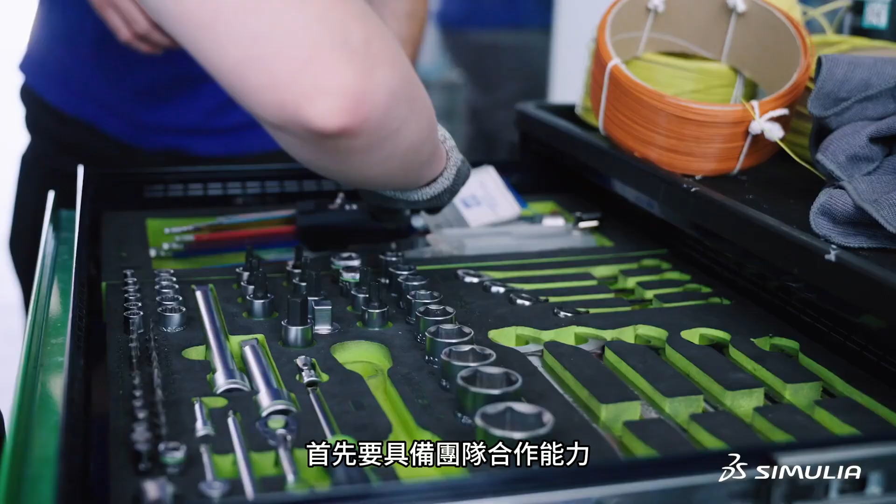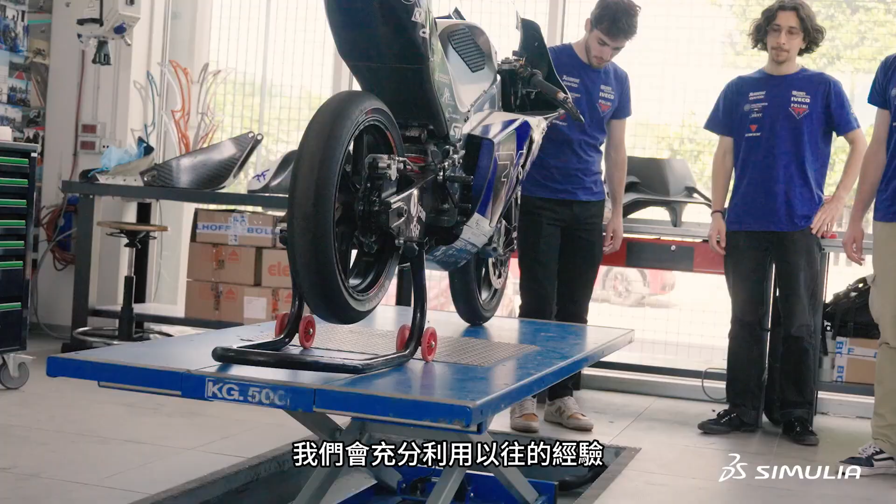The first quality is the ability of collaborating with other people. We start with mechanical engineers and we end with designers and architects. We don't start from scratch, we make treasure of the past experiences, but we try to start over and build new prototypes with improvements.

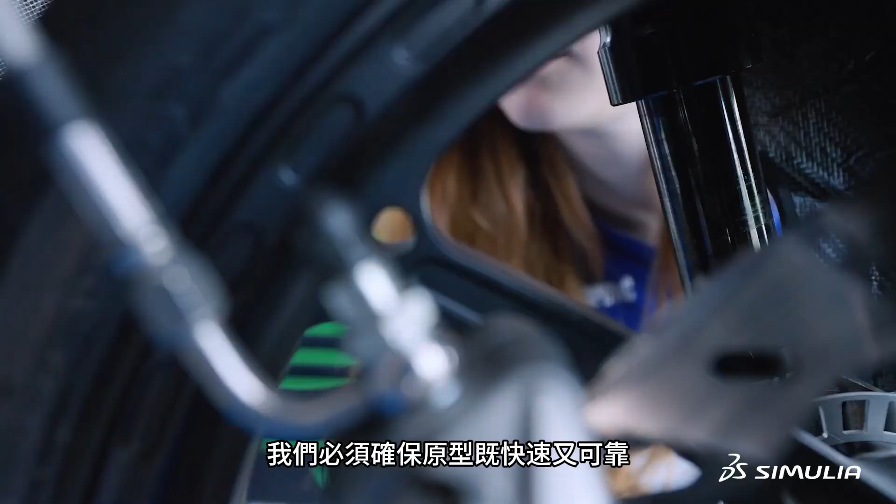We have to make sure that our prototype is fast and also reliable. And given the structure of our competition and our limited budget, simulations are greatly important to us. We need to simulate every single piece of the motorcycle in order to make our best.

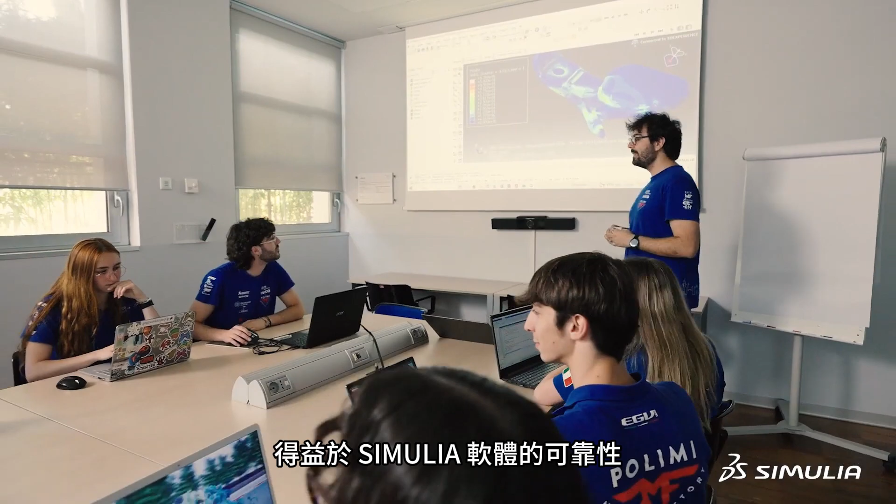We as a team started working with SIMULIA because of the reliability of the software. For the chassis and dynamics department, we rely on multi-body simulations as well as more analytical simulation based on analytical calculations.

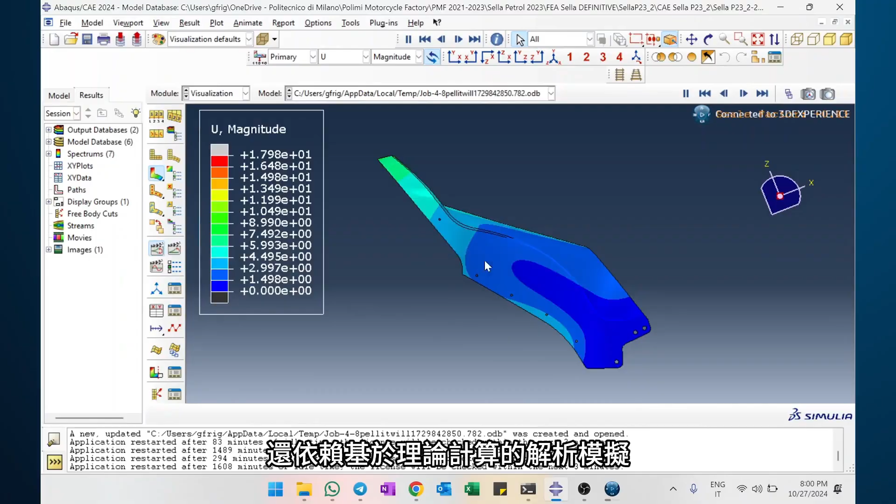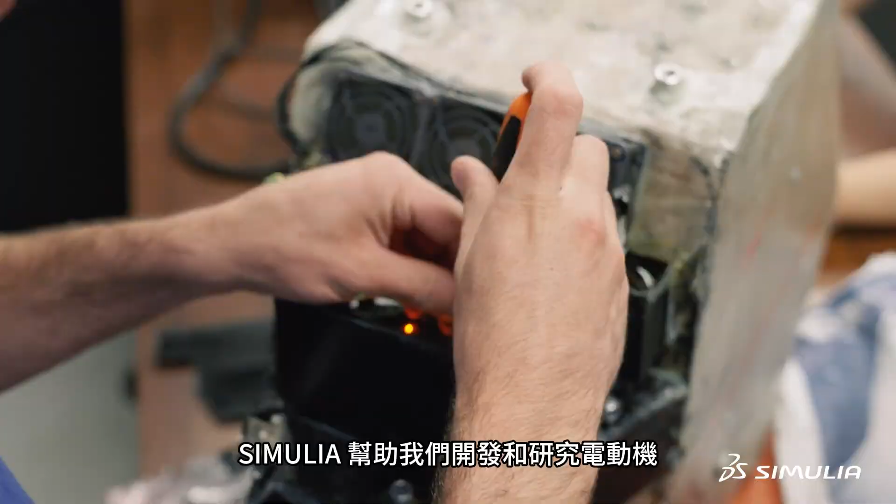We use simulations for all the development of the external aerodynamics of our prototypes and also for the development of the intake system. On the electrical side, SIMULIA helps us to develop and study the electric motor.

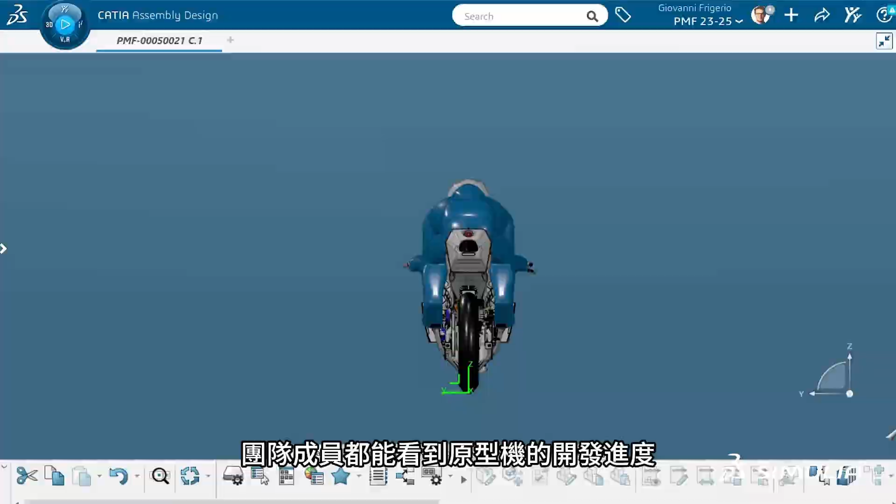With the electromagnetism side, we adopted the 3DEXPERIENCE platform because we can work on the same project together. It allows all the team members to see the development of our prototypes. Everybody can work on their own environment, but there is also a shared environment where everybody can see the development of the process.

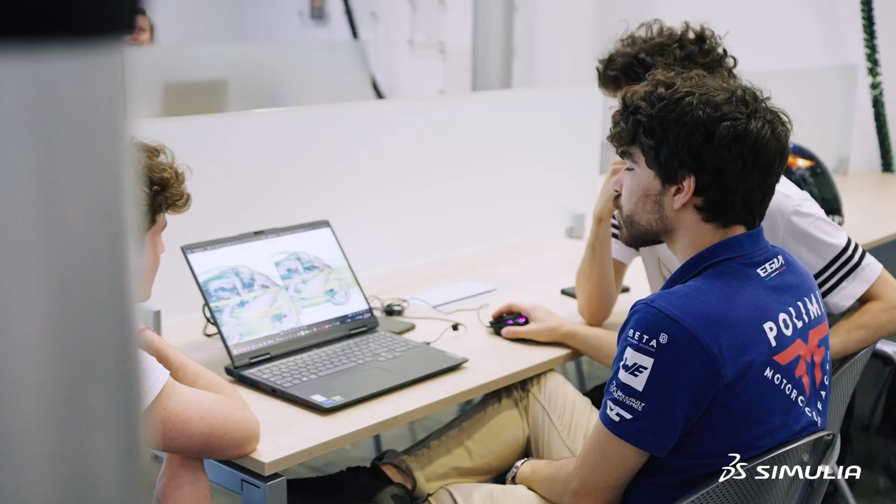The use of different tools of SIMULIA is quite intuitive, so it helps us to work in an easy way. We can see the modifications made by a user and exchange ideas by simply modifying, for example, the drawings or the models.

SIMULIA provides us with a great level of confidence. Together with the 3D Experience platform, we want to win the competition.

I love the 3D Experience platform because it allows us to take the next level year after year and improve the performances of our prototypes.

I love the 3D Experience platform because it helps us reaching our dreams.

I love the 3D Experience platform because it is easy and it is similar to our team.